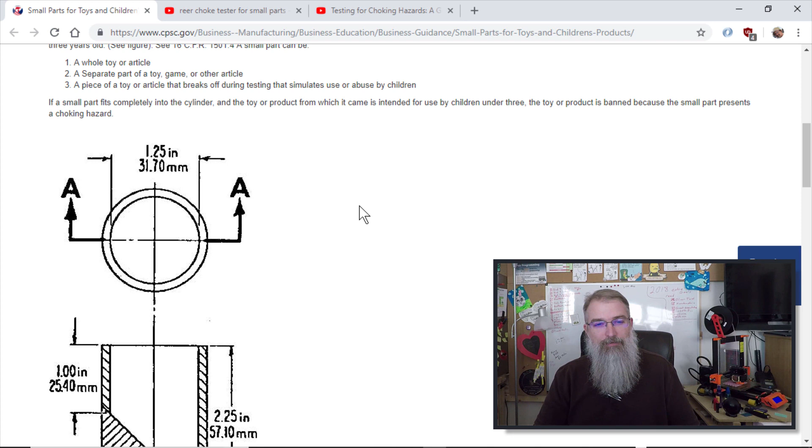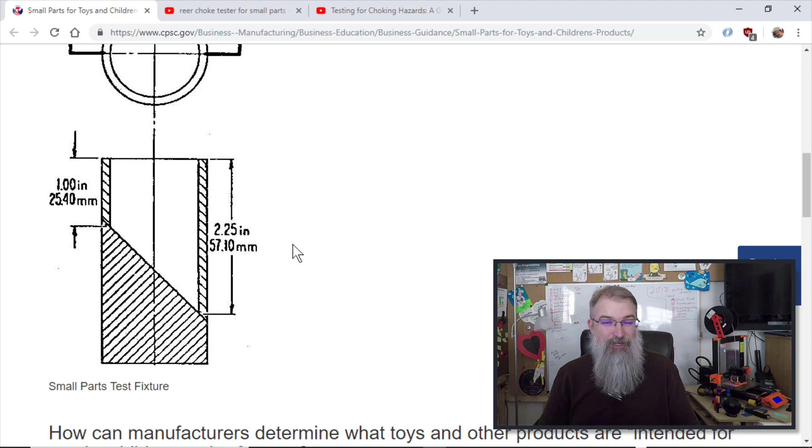Here is the Consumer Product Safety Commission webpage. You can go here and find out a lot of information, which I'm not going to go into detail, but here they give the exact measurements for the device they use to actually do this. And here it is. It's 1.25 inches on an inner diameter. And then it has a little angle in like this. So it goes down like it's just a cylinder, and there's an angle, and it's 1 inch on one side and 2.25 inches on the other. So I'm going to go create one and 3D print it out and then examine my objects.

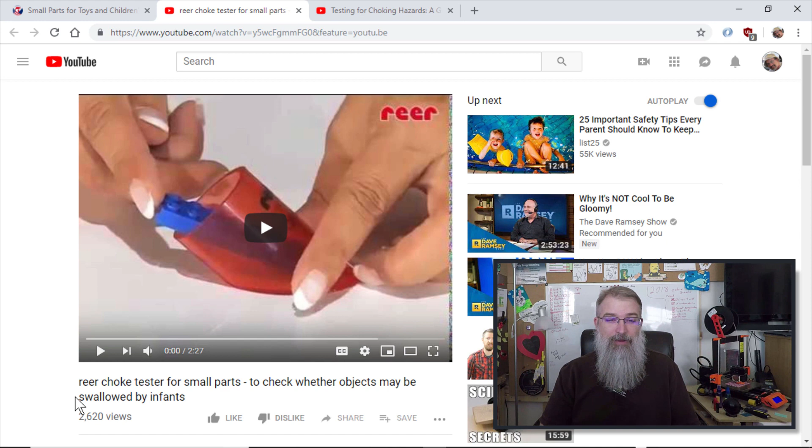Now, a couple other videos I found that were interesting that might go in more details on how this all works. I'll put these in the show notes too, but one is titled reer Choke Tester for Small Parts to Check Whether Objects May Be Swallowed by Infants. That was a good one, had some information on there. Another one I found was Testing for Choking Hazards, a Guide for Parents. So I watched both of those to kind of get an idea on how this is used and why it's used. But with that, let me go into Fusion 360 and CAD one up.

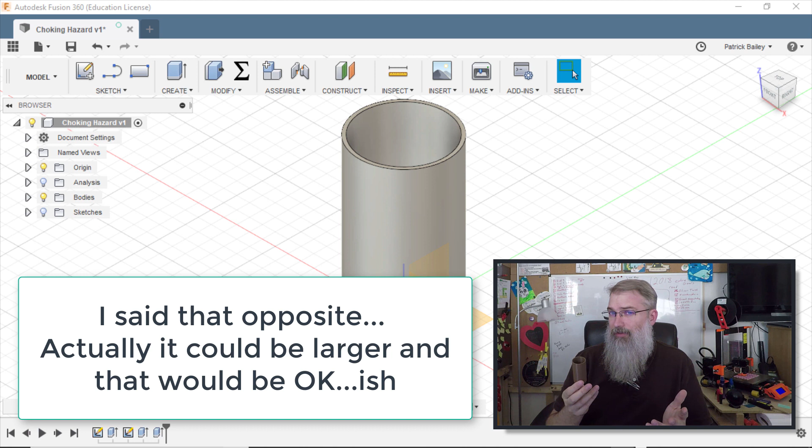Okay, now I already CAD'd one up in Fusion 360, and I actually already printed one out. So here's actually my little guy. But I want to show you how I did it, because it's important that it has to be precise. It could be larger, and that's okay, but you definitely don't want it smaller. And when it comes to 3D printing, I could go in there and resize it. I'm going to put this thing out in Thingiverse. But if you download this from Thingiverse and you print it, after you print it, measure it and make sure it is the right size, because something could have gone wrong in the translation.

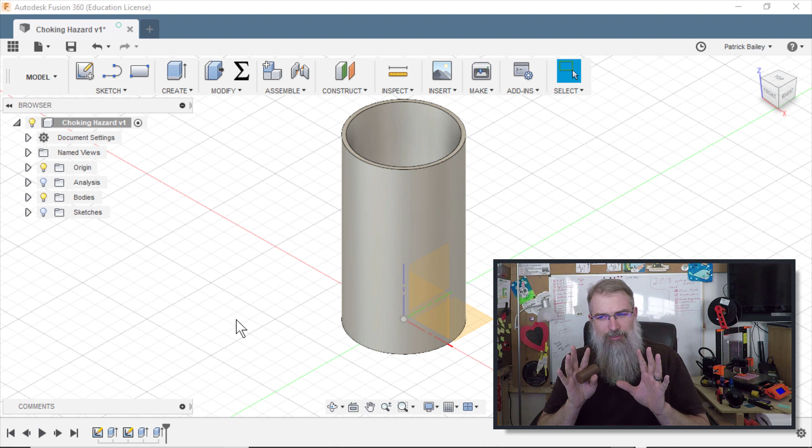STL files are unitless. They don't know about inches or millimeters. Now, typically, Fusion 360 knows millimeters, it knows inches, and so I do millimeters in Fusion 360 for simplicity, and when I translate that to an STL file, a millimeter unit ends up becoming a unitless unit in STL, and so it actually works out. The sizes are the same, but you want to make sure, because I could put it into a slicer and double the size, and then it doesn't count. So be very, very cautious. When you print it out, measure it, measure it, measure it.

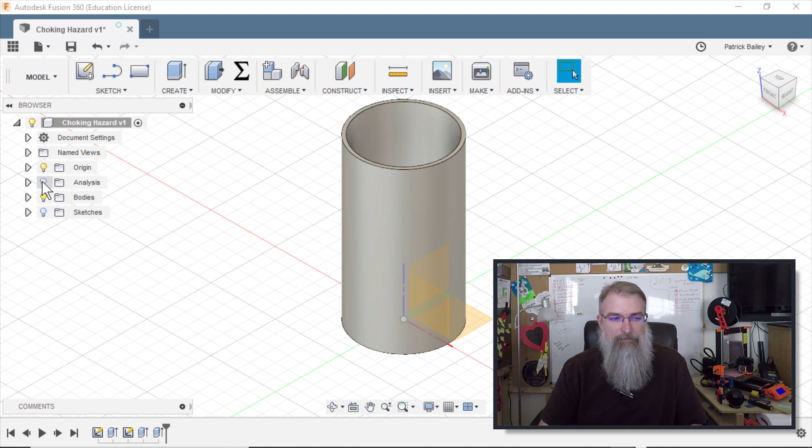But I'm going to show you what I did and repeat. I'm going to make a new one. I'm not going to put this one out in Thingiverse. I'll put the new one, which should be the same. But anyway, if I do an analysis here, you can see that is what is created. So with that, let me go start a new one and show you kind of what I did. So here we are.

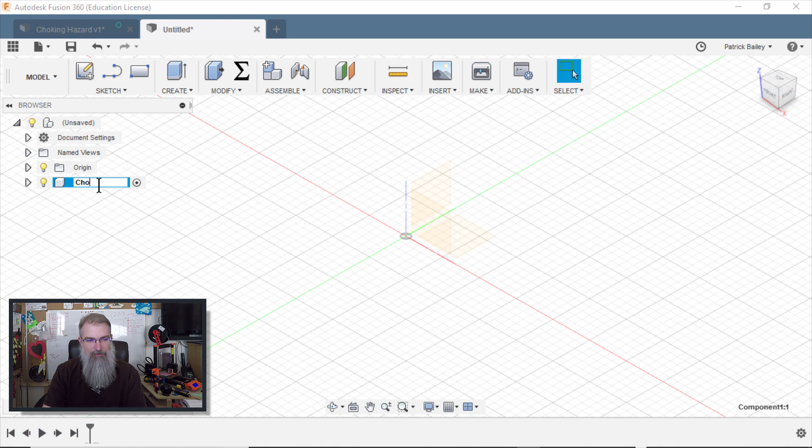I'll click on that to show the origin, then right-click and say New Component. Even though there's only one component, it's a good habit to get into when you're doing Fusion 360. I'll just call it Choking Hazard. It probably has an official name, but I'll just call it that. So what I have here is an inner diameter of 1.25 inches.

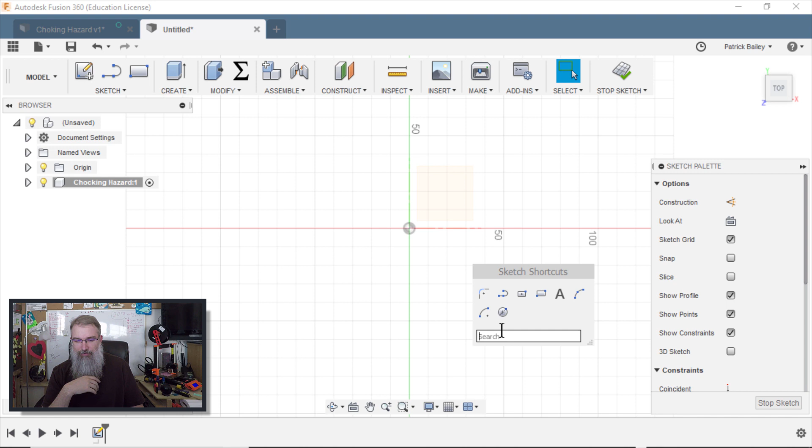I'll right-click on this plane and say Create a Sketch. What I'll do is create two circles. I'll press the S key to bring up the shortcuts, then search for circle, but I've already brought it up since it's one I use a lot. So, center diameter circle - click on that.

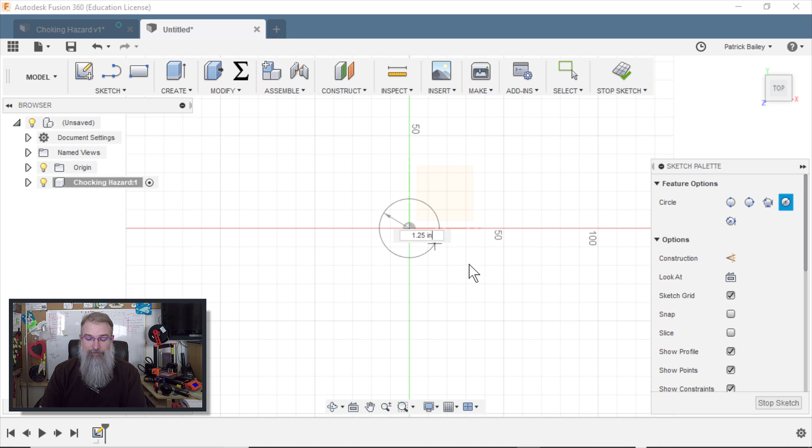I'll click on this to anchor it, and the center diameter needs to be 1.25 inches. Now you can see here in blue, it's in millimeters right now because I have my Fusion 360 set up to do millimeters. However, I can override that, so I can say 1.25 and type in inches. And there you go - it converts it, so it says 31.75 millimeters, but that is 1.25 inches.

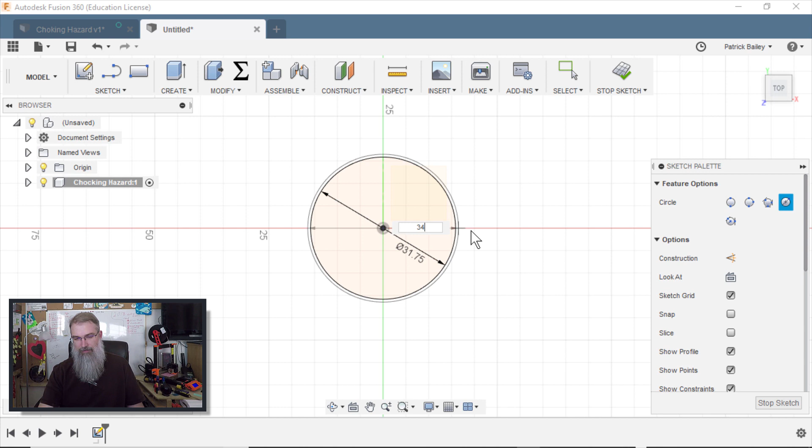So I hit S again, get the diameter tool again, and this one I'll make a little wider. So that was 31.7, I'll say 33 - doesn't need to be very thick. 34, boom, there we go. So we'll try that, well, let me change it again - so 31, let's make it 33.75. Boom, doesn't need to be thick at all.

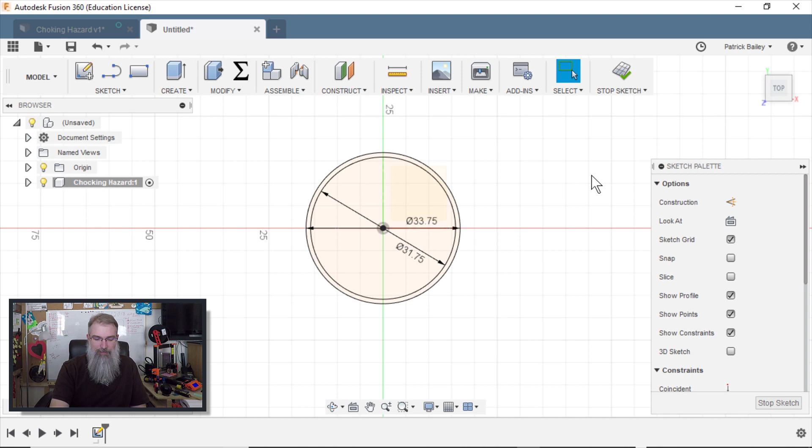And then what I'm going to do is I need to raise the whole thing up. So this is where it gets a little entertaining. Let me think what I did before... That's what I did. So I can say Q, I'll press Q for my press pull tool, and I'll go in here and select both of them in this case, and start to pull it up. I know in my drawing here, the lowest one is 2.25 inches.

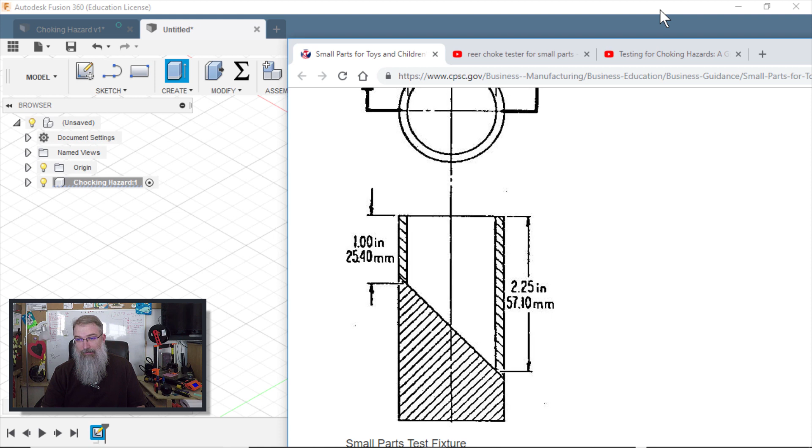So over here, it doesn't have to be much thicker. I can say 2.4. In fact, I think the one I made was a little probably too thick on that. Yeah, we'll say 2.3 inches. And it adjusts itself, and now I have this outer cylinder.

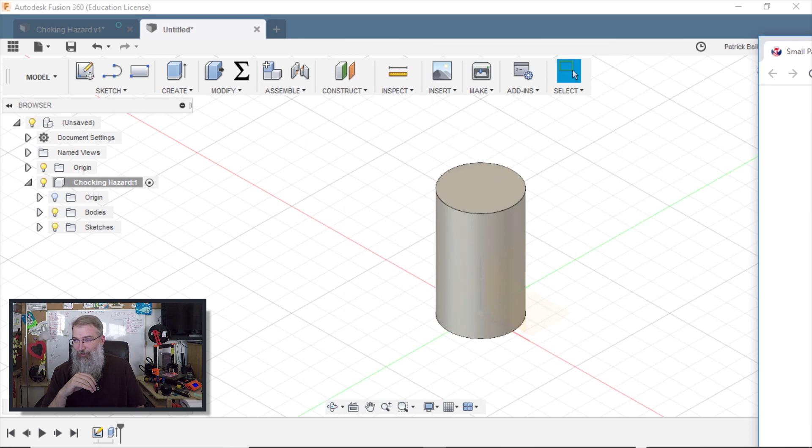But now what I need to do is cut away some things. So I need to cut this out from the inside, which I can do, which is really kind of cool. I can go in here and click on this to remove the body so I can see things, and click on this plane here and say create a sketch.

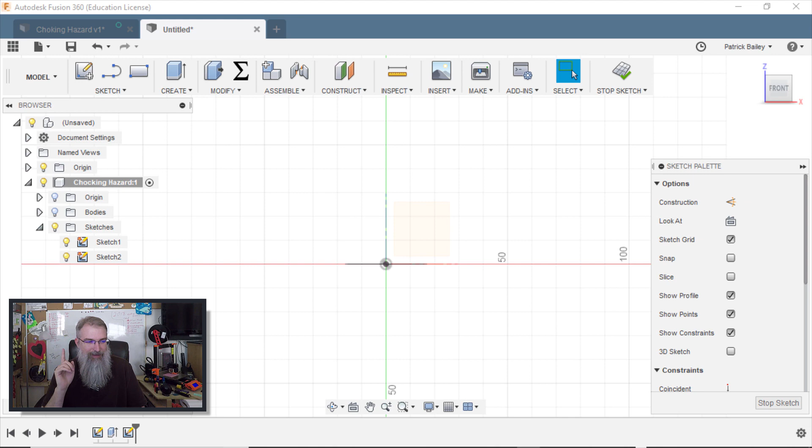And then I'll show this body real quick - well no, I don't want to show the body, let me show the other sketch. I need to back up and redo this. Okay, give me a second to rethink what I did. There's always more than one way to skin a cat, so I was thinking about a couple different ways to do it, and I got myself mixed up.

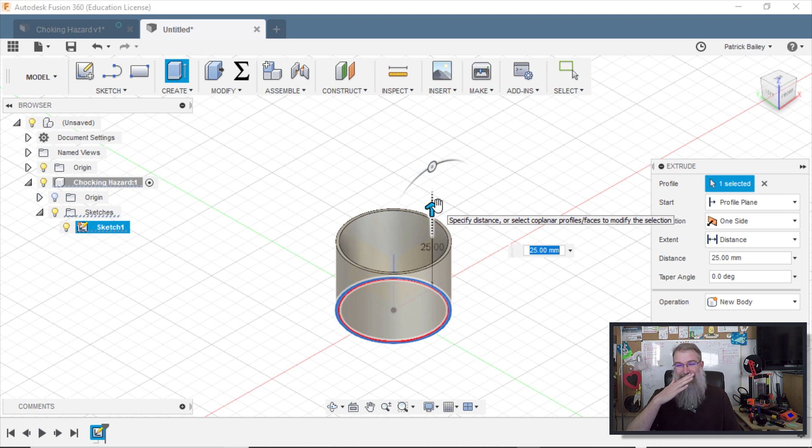Stepping back, I don't need this full cylinder. I could make it work with this, but I'm going to go back in my history and pull this back to my first sketch. Right-click on this, delete it. Right-click on that action, delete it. And then here, press Q for my press pull tool, and just select the outer ring, and I'll pull it up here. That angle is 2.25 inches, I'll do 2.3 inches. And now I've got this ring.

So then what I'll do from here is click on here so that body goes away, I no longer see it. And then I will sketch on this plane - click on this plane, create a sketch. I can look at an angle here if I want. And I'm going to press L for the line tool and choose the center, and go along here at a 0-degree angle.

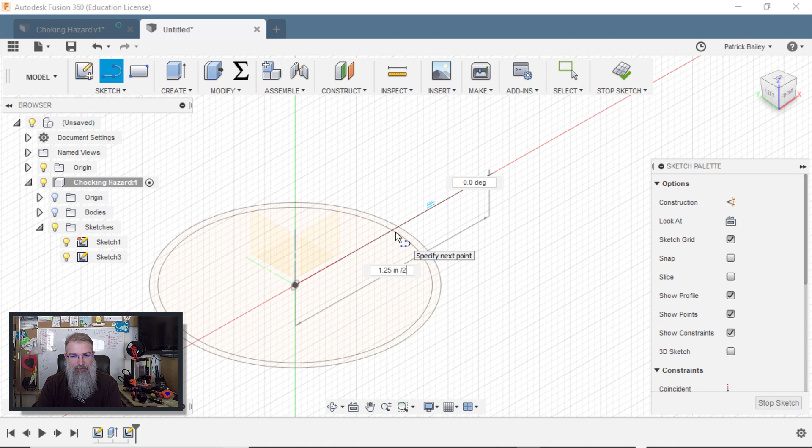Now here, the funny thing - if you don't know this, you can do math in Fusion 360. So I know the diameter here of this inner ring is 1.25 inches, so I can say 1.25 inches divided by 2, and that hits me right on that spot there. I'll hit L for my line tool again, go the other way, and do 1.25 inches divided by 2. Oh, where'd you go? There you go. Pull that down. So now they're hitting that side just fine.

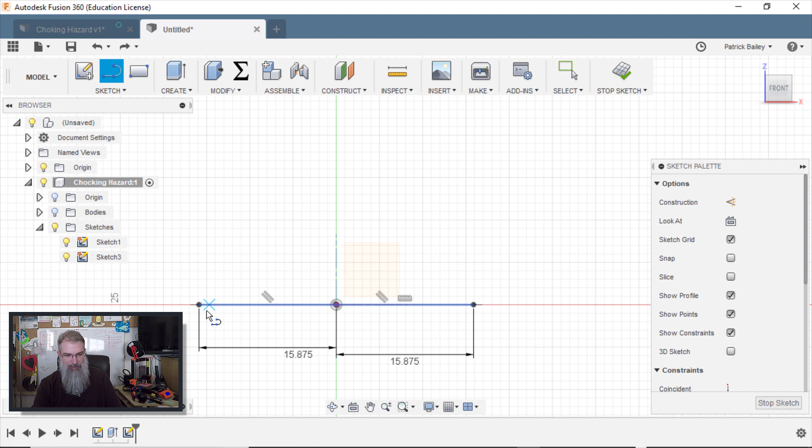And go back here to the front. Hit my L key, and now go up - oh, don't want to do twice. L, click on that, go up at a 90-degree angle and do 2.3 inches. Do the same thing over here - 90-degree angle, 2.3 inches. And now those tops should be hitting the top of the cylinder. So if I bring my body back, you'll see they are, but they're on the inside.

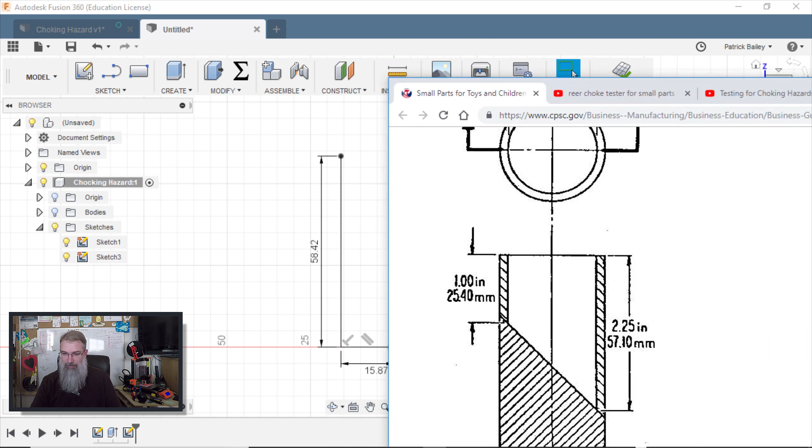Now if we look at this drawing over here, we'll see - oops, stop - we'll see that's supposed to be 1 inch down over here and 2.25 inches down over here on the inside. Now these lines are drawn right now on the inside. Let me pull that out so it's easier to see.

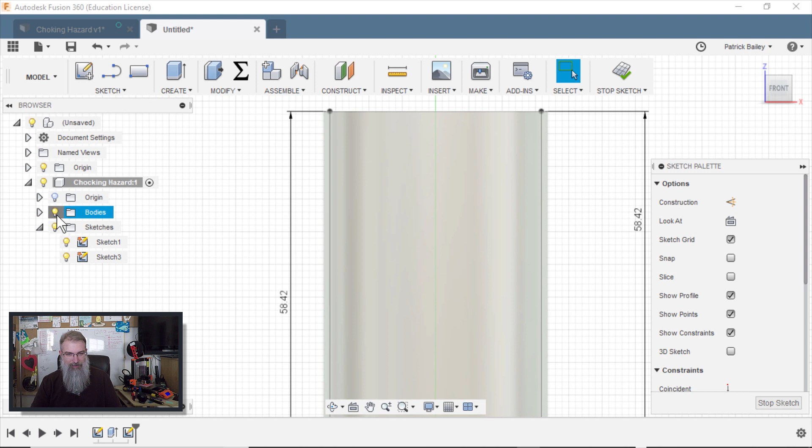So if I zoom in, you can see that they are on the inside. I'll take that away and draw another line, take it from here, go down here, and go to 1 inch. There we go, so that point is where it's supposed to go down.

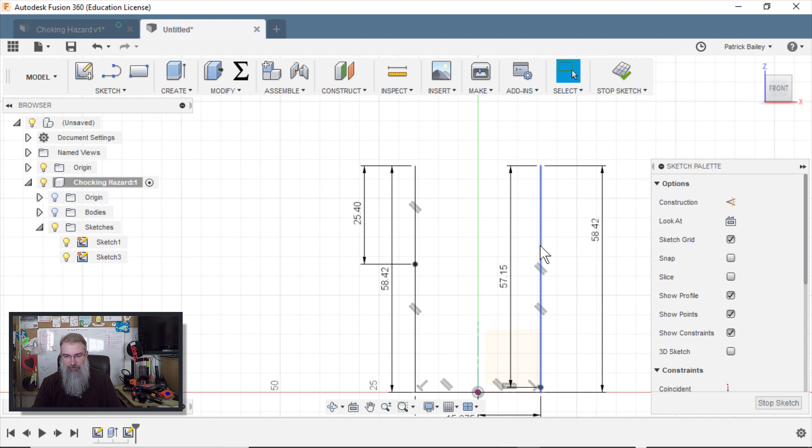Hit the L key, go over here, and go 2.25 inches. Those 2 points are where it's supposed to angle down. So I can hit my L key, click there, click on that. Oh, let me close it up here. There we go.

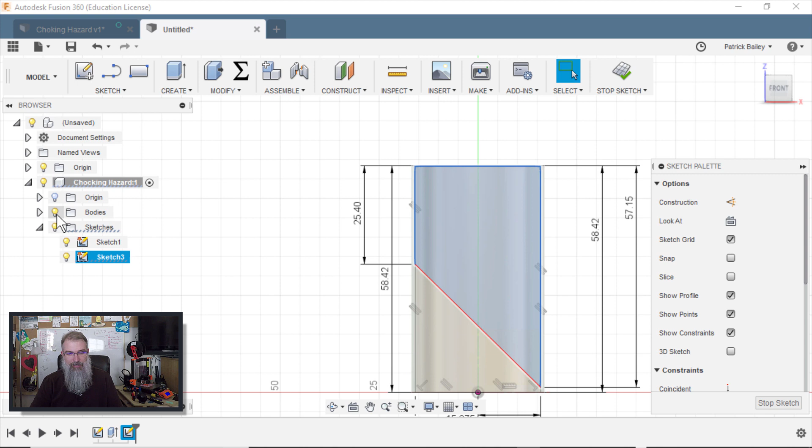So here is what's supposed to be a void inside of that. How do you do that? Right now I actually have kind of a funny situation here - my whole thing's a void, so what I need to do is fill in that bottom part.

Let me take that body out for a second. Select this guy, so basically I want to fill it in all the way to the edges. I can press Q, my press pull tool, and pull it out here, but let me bring the body back. If I pull it out here, rather than doing a cut, I can do a join. But, as you can see, oops.

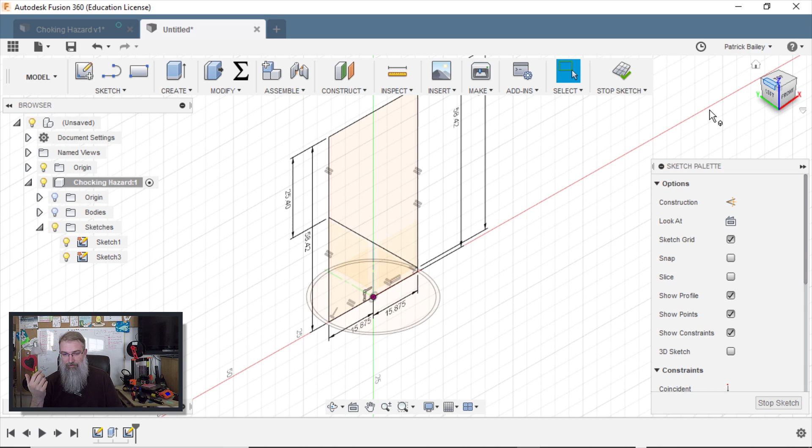Oh, that sketch, where'd you go? Oh, get me set back there. Get rid of that body, do a Q, select that guy, bring the body back, and pull it.

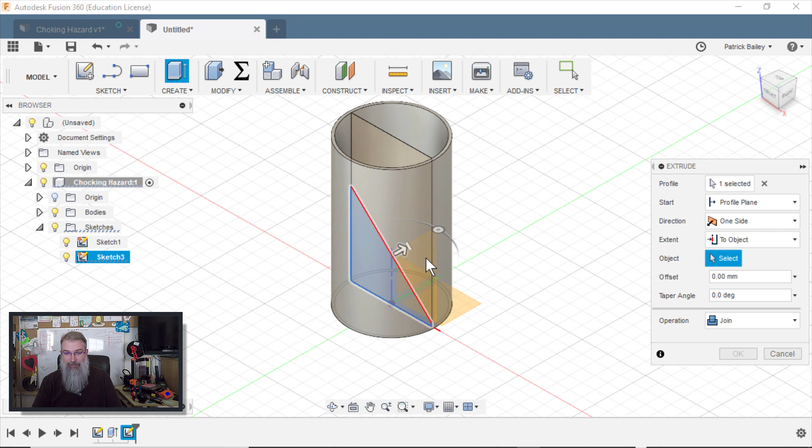Change it to join, but now I got this funny shape because I got this thing coming out. What you can do, rather than just have this funny shape go out, you can say, rather than extend it a distance, extend it to an object. So I can select this object, and select the cylinder, and hit OK, and it should have joined that half.

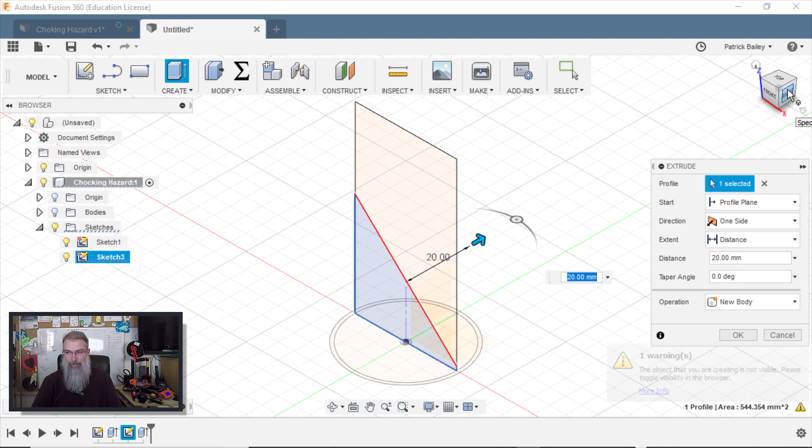I need to do it on the other side too. So let me get rid of the body, bring back that sketch, press Q, select this guy, pull it this way. In fact, I'll click over here so I'm on this side a little bit more. Bring the body back, do a join to an object, to this object, hit OK.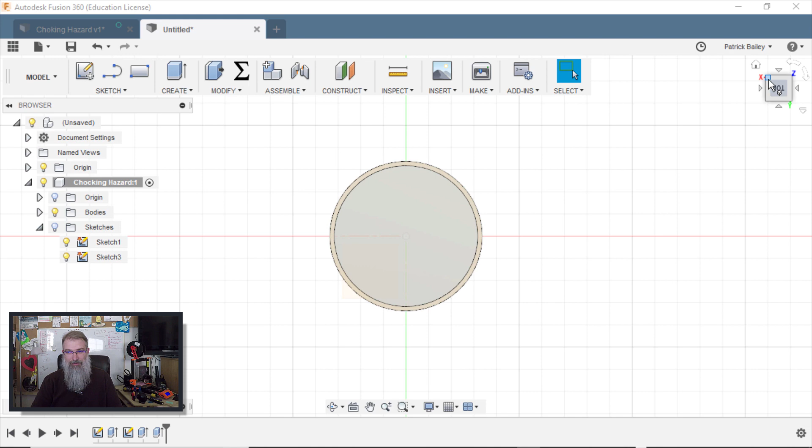So now if I look at the top, and I'll get rid of my sketches, I can kind of see that, but it's kind of hard to see where it's going. It's a little peculiar. So let me go here and go to my front, or back. Let me go front, there we go.

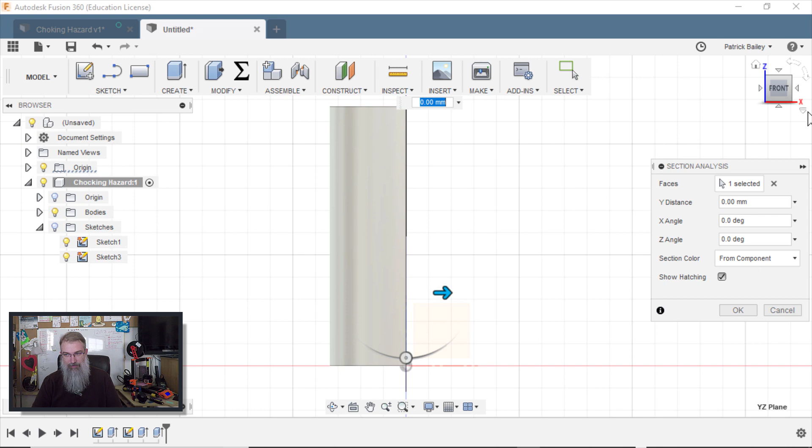And I can go to inspection, and section analysis. Click on that, click here. Oh, I didn't want that side, but you can see it's going up. I didn't want that quite that side.

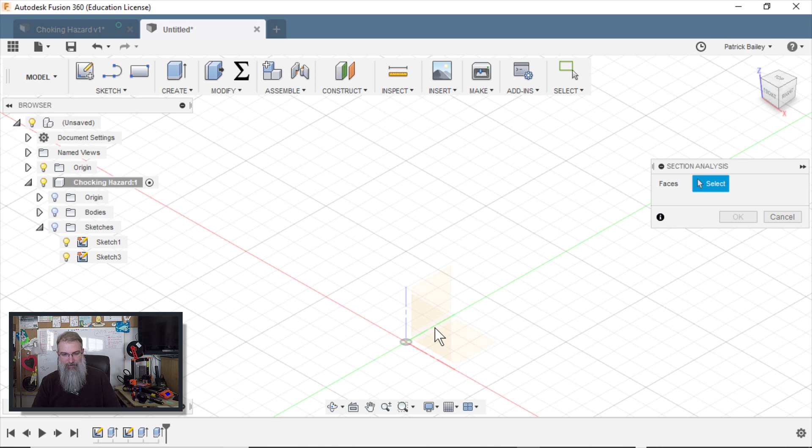So I can do inspect, section analysis, and let me get rid of the body for a second, click on this, bring the body back, hit OK, and there we go. So there we are, cut halfway between, and that's exactly what I want. There's only a little bit of space down here, but that's okay for what we're doing.

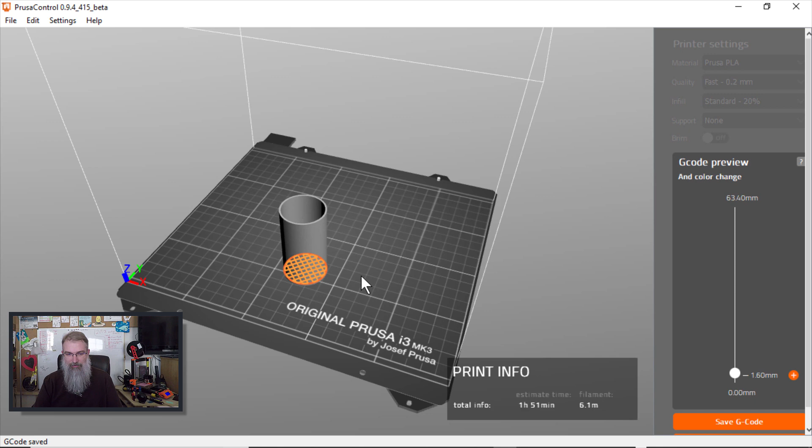The one I made before is probably a little thicker. So let me turn off the analysis. There's my object, so now this is my old one I made. Let me go back and now let's make it into an object.

So I'll go here and choose 3D print, select this guy. I don't want it to go to Meshmixer. Hit OK, and I'll call this Choking Hazard 2.

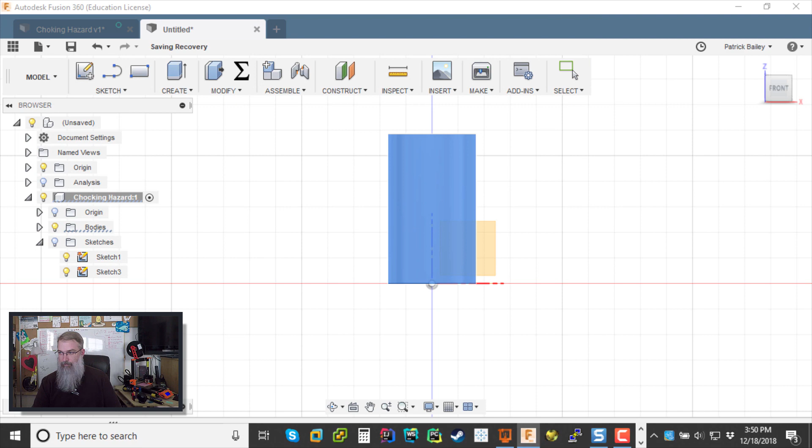So that's the one I had before, and now if I go to wherever I stuck it, there we go - Choking Hazard 2, so I'll drop that in. And you can see, yeah, I did make this one shorter. You don't need all that extra stuff I put in there. So I will do this one, delete that.

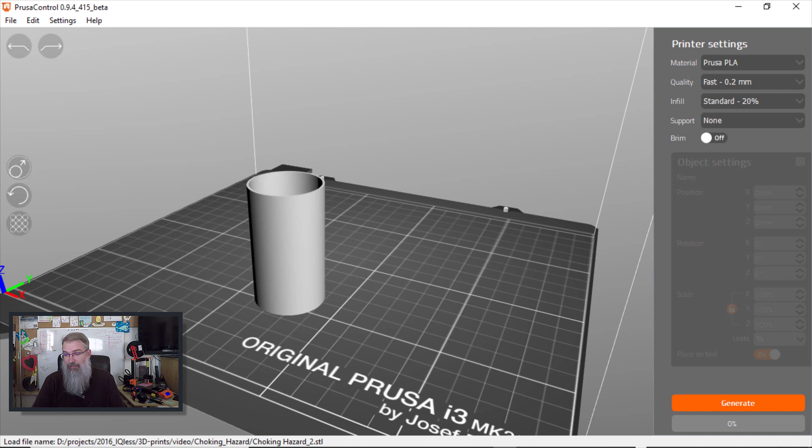Now this doesn't have to be all that special. I'm doing 0.2, 20%, and hit generate, and we'll see what we get. Okay, so we got that, and we can see there it is going up, just as planned.

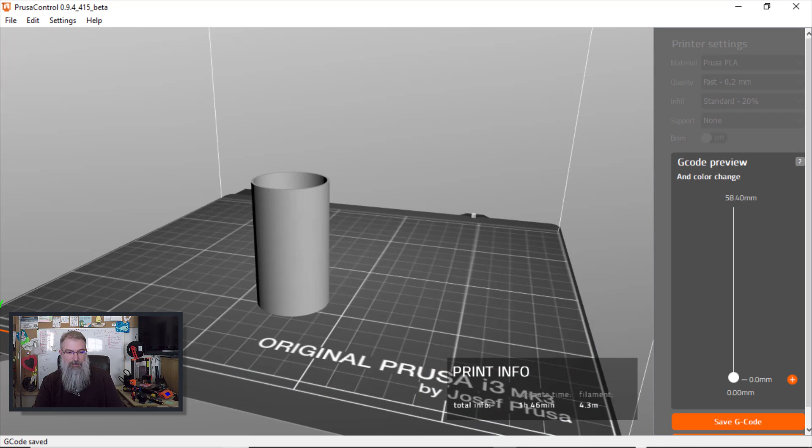So let me go save the G code for Choking Hazard, Choking Hazard 2. Then go save this G code and print it out and then fiddle with it.

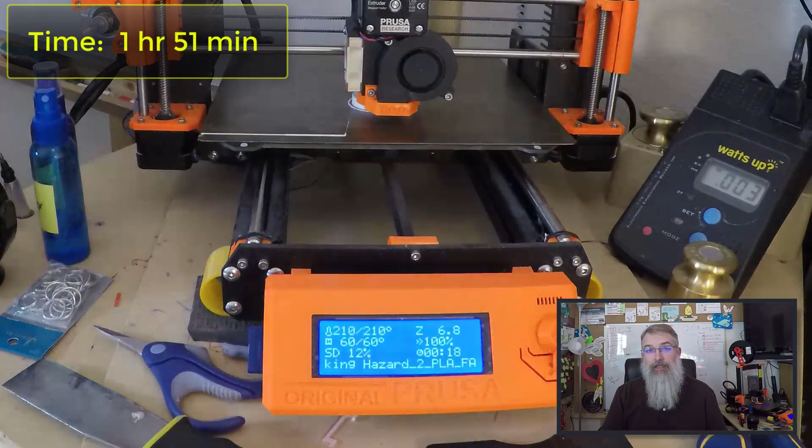Okay, so I finally got one printed out, a new one printed out based on that design, and I also put it up on Thingiverse. But before I go into some more details, let me go over the numbers. So this took 1 hour and 51 minutes to print. It took 1.7 cents worth of electricity, and it weighs 0.012 kilograms, which at $20 per roll comes out to 24 cents worth of material.

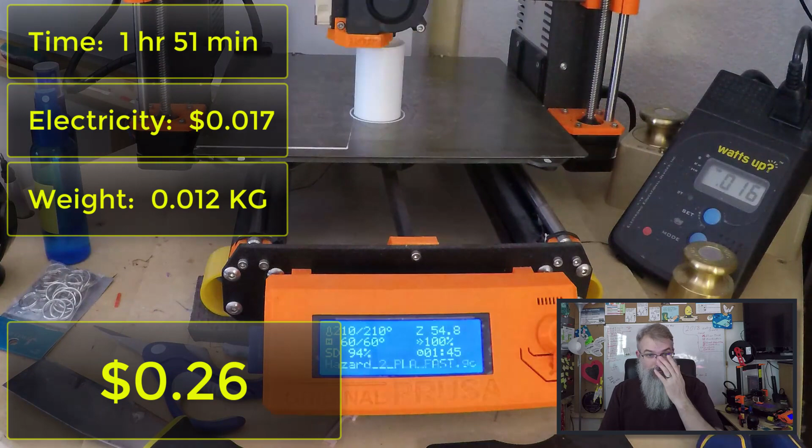Total cost to do this was 26 cents, so not bad. Now, to go over some other details, I put this up on Thingiverse. It happens to now be thing 3298630. And I put 2 files up there: the actual guy here, and also to demonstrate it, one that's cut in half so you can see what's going on.

Now again, I don't want to overemphasize the danger of this. The idea is if you have a small part, that's fine, you can print small parts, or if you have a big part that could break into smaller pieces. But if you want to play it safe, anything that's small you want to keep out of toddlers' hands.

So in my example, I'm doing a conference in June. Last time I was there I didn't think about it, I think all my stuff was actually fairly large, so I lucked out. But I put all this stuff on the table for people to touch and feel, it was 3D printed, and some toddlers could have gone up there and grabbed some stuff. As I recall, everything was big.

But now I'm changing things up. This year, I had these last year too - I printed out a bunch of little small 3D printed carabiners. So if I take this, looks like I'm good. If you go from a side view you can see, and we have to get some sunlight.

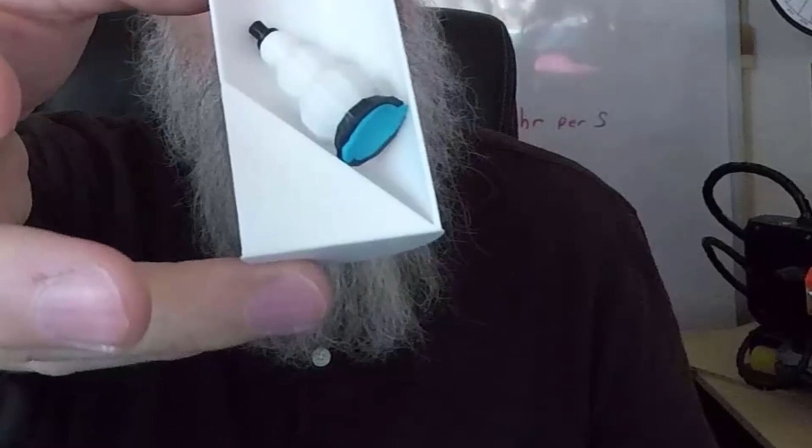However, a different thing - I did print this out last year as a demo. I had a little tiny snowman, but I only printed out 1 or 2 and held on to pretty tight, so they weren't out for display. And he, of course, fits in there very easily. So I can stick him in here, and you can see he fits in there real easily. So this is something you're going to want to keep out of the hands of toddlers.

I also had a little mini Nefertiti bust that I printed out last year. Well, kind of get it in there, but looks like I'm safe on that one. But this year I had a thought.

Since I'm printing so many of these carabiners out to hand out, I was going to give some away in parts so that some of these kids could mix and match the parts. The bigger part, I'll take one apart - take one of these guys apart. The idea is I'm going to put them in a bowl and kids could grab them. But this, the big part, not a problem, we're good.

However, this little guy, the handle, the door, I can put him in here. Too much shadow on - there, it goes in there just fine. It's something I don't want to have near a toddler.

So if I'm going to put a bowl out for these kids, I need to do it in such a way that it's behind and high up and well guarded, so I'll avoid this danger. But also, who knows what you have in your house? This might be an important thing. In my house right now my youngest one's 10, so I don't have to worry about this. But had I started 3D printing years ago, this could have been a concern because these things are bright, shiny, interesting, and if you got a toddler running around they're going to want to grab it.